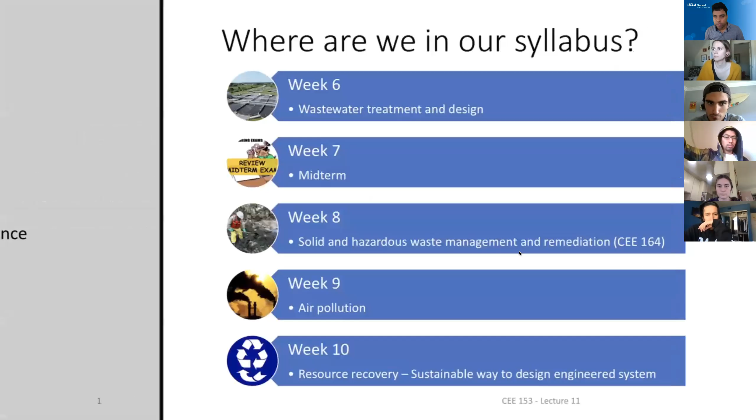Right, so this is lecture 11 on wastewater treatment plants and design. Again, just to confirm, this class will be part of the finals. So everything we cover from now on will not be part of the midterms, which is on week 7, as you see over here.

Hold on, let me see, the key's not working. Seems like the Bluetooth is not working, so I'm just going to turn it on. Pencil, see if it is connected. No. Okay. Right. So now this will work.

If there are new terms, I'm going to emphasize those so that you know the concept of those specific terms. So these are the different objectives. I strongly suggest there is a 10-minute video of how wastewater treatment plants work, and you should watch this one to get an idea of the concept. But I'm going to show another small 3-minute version that will give you a more specific example of how a wastewater treatment plant works.

Just to give an idea, here you are not looking at wastewater coming from industry. We are looking at domestic wastewater. Domestic means like people's sewer, that doesn't have lots of toxic chemicals. This is just organic from the kitchen sink, your restrooms, all that water goes to the wastewater treatment plant. So just to clearly emphasize there. So let's watch a 3-minute video so that you can see how it works before we go to individual concepts. So I'm going to see if that works.

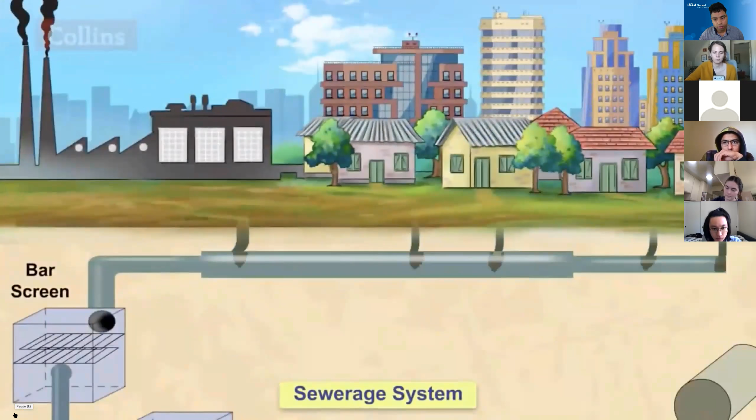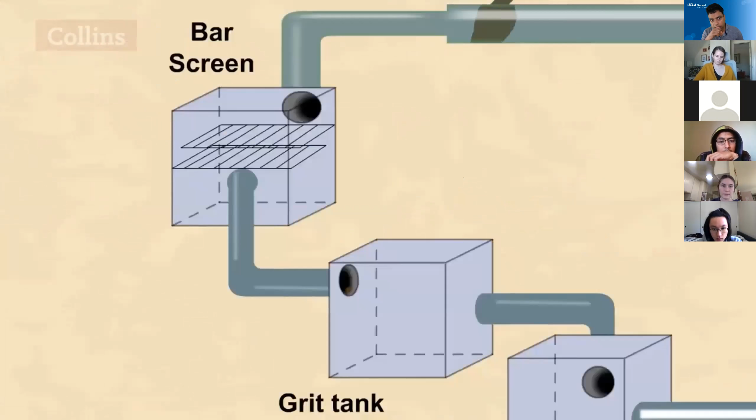Cities and towns have sewerage systems in place to carry the wastewater from our homes, hotels, factories, and other establishments to a sewerage treatment plant where the wastewater is treated. It is then deemed safe to release into other water sources. The treatment of wastewater goes through different stages. Wastewater is treated to remove the physical, chemical, and biological contaminants present in it through various processes. The pre-treatment process involves the sewage being sent through grids or vertical bars that can remove large solid substances like metal cans, paper, and plastic materials. In the primary treatment process, the sewage flows through the grit chamber very slowly, so that the sand, pebbles, and soil settle down at the bottom.

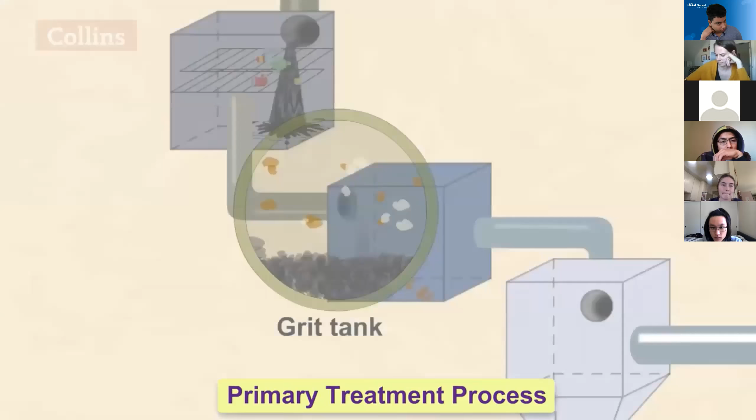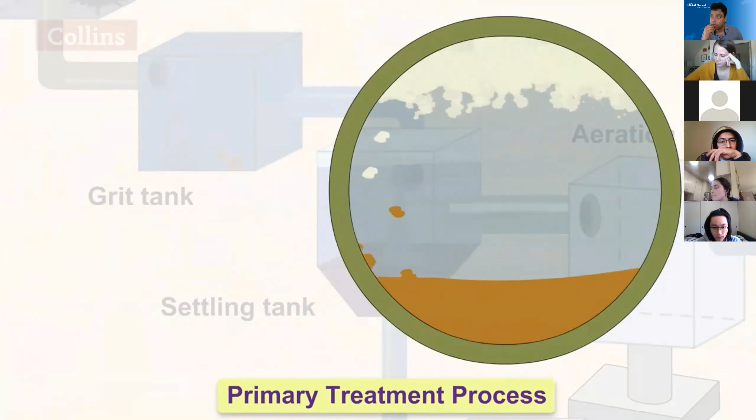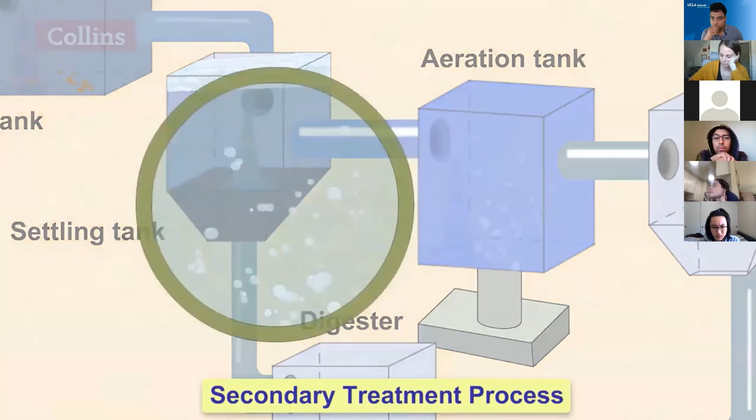The sewage flows into the settling tank or sedimentation tank, where the solid wastes like feces are allowed to settle down. Wastes such as soaps, oils, and grease rise to the top of the wastewater. The waste material that settles down at the bottom is called the sludge, and the floatable material is called the scum. Scum is then removed using a skimmer, and sludge is removed with a scraper every few days. The water that is left out is called the clarified water. In the secondary treatment process, biological or organic wastes are removed. It is a biological process. This is done by transferring the clarified water into an aeration tank, where air blowers bubble air, which helps the aerobic bacteria to grow and feed on the organic contaminants, such as food waste, feces, and other organisms.

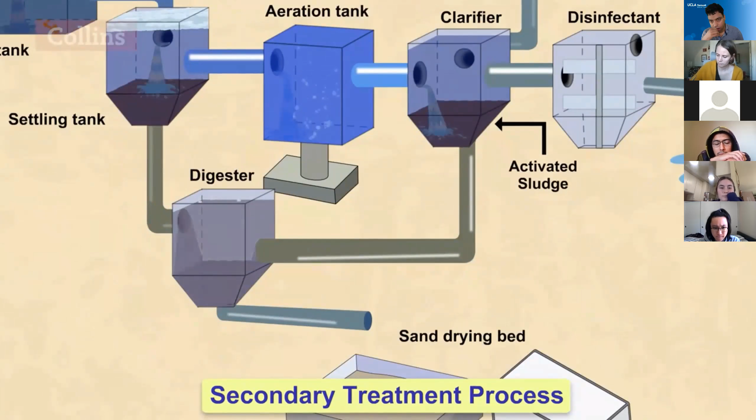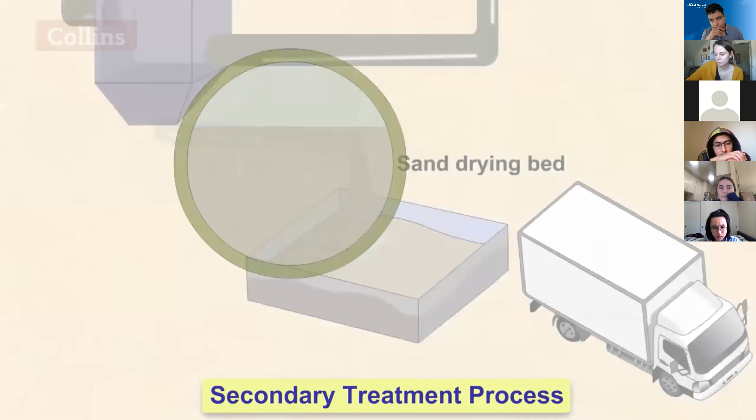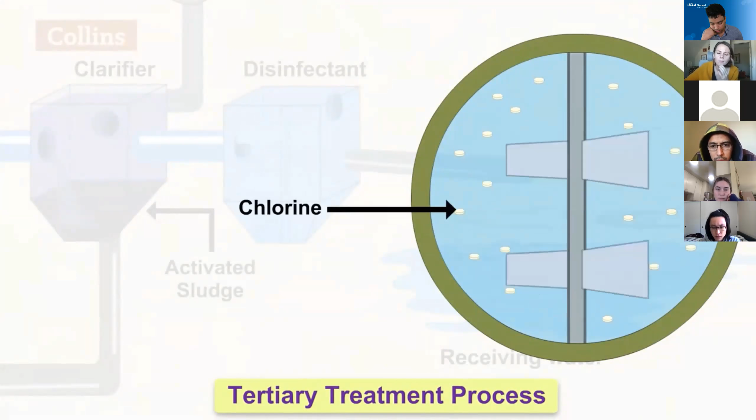The mixture then flows from the aeration tank into the clarifier, where activated sludge settles out by gravity. The activated sludge so produced, along with the sludge produced in the primary process, is transferred to the digester, where it is decomposed by anaerobic bacteria. Biogas is produced in this process, which can be used as fuel or can be used to produce electricity. The activated sludge is then left in the sand drying beds. Some quantity of water in the activated sludge evaporates, and the remaining quantity drains through the sand beds. This leaves behind the remaining dried sludge, which can be used for making fertilizers or compost. In the tertiary treatment process, the leftover wastewater is treated with chlorine to remove the phosphorus compounds, nitrogen compounds, and bacteria. It is a chemical process. Chlorine tablets are added to kill the germs. This process is called chlorination. Then this water is let off into the water bodies.

What you just heard was a basic overview of how wastewater treatment plants work, but the specific design or the very specific units are different for different wastewater treatment plants. For instance, it says it's a biological process, but many wastewater treatment plants are anaerobic, where you don't have these aerobic reactors. And the disinfection isn't just chlorine; it could involve a lot of other factors. Many wastewater treatment plants do not remove nitrates, nitrogen, or phosphorus compounds, so you need other filters or processes. Everything isn't described in that one video—it just gives you a basic overview of the most common units.

Think of wastewater as sourced from different kinds of locations: domestic, industrial, agricultural. What we're discussing today is mostly the domestic type. If it's agricultural, you have high nitrogen content—high N and P nutrient content—so you have to remove those more in a different design. But if it's industrial, it has a very specific type of pollutant, so it might need very specific types of units. That's why you have to be mindful about which wastewater you're treating, what it contains, and what your main design goal is.

Just to let you know, 99.9% of wastewater is water. So by far the majority, by weight if you calculate, 99.9% is water, and the rest, 0.1%, is all the stuff we're talking about. That's based on mass. So the majority of the resource you're looking at is water.

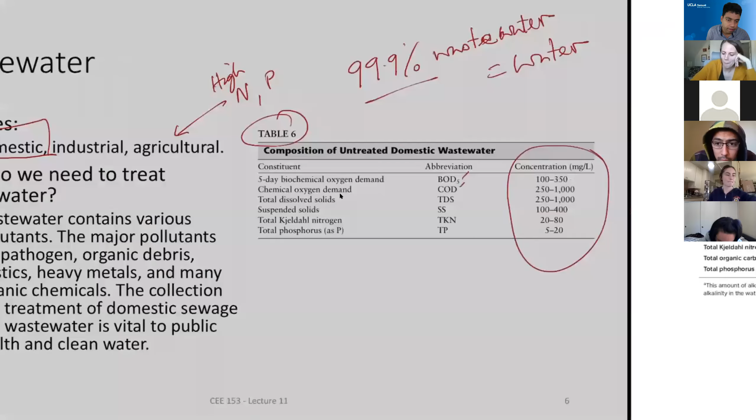But mostly what you're looking for is this type of pollutant, because the majority of these pollutants determine what kind of treatment units you should have. This is just to give you a range—last time I showed you the range here. This shows the medium concentration, strong, or other factors. As I said, there are lots of non-conventional pollutants we don't write there.

Many wastewater treatment plants actually monitor for pollutants, because if they're releasing into surface water, there's a TMDL, or total maximum daily load, associated with that. So they want to make sure they're not releasing a high amount of a specific pollutant, and they do monitor all these pollutants. But just to give an idea, wastewater treatment plants aren't designed to remove very specific pollutants. If you have a specific concern, they have to add a specific unit before they discharge it.

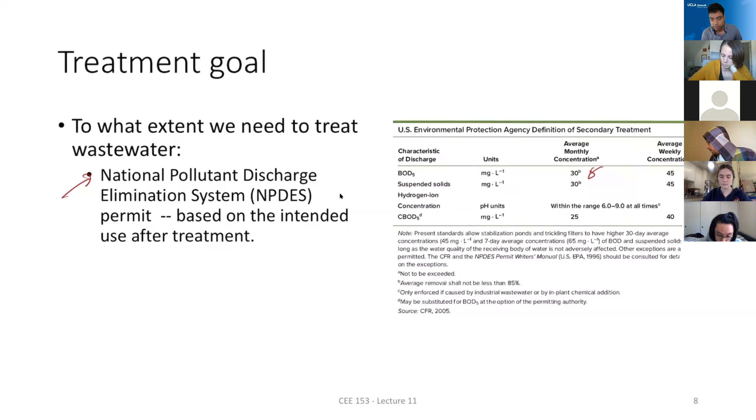That's why there is always a treatment goal based on a particular act—the National Pollutant Discharge Elimination System, or NPDES permit. Every wastewater treatment plant has that permit because they're discharging wastewater into a surface water source. For instance, in LA, we discharge most wastewater into the ocean. So there's a concentration limit—what pollutant concentration you need to have before you discharge. They monitor those, and these are the typical treatment goal concentrations. BOD5 should be less than 30 milligrams per liter, and so on for all the other parameters.

Then you have primary settling. Primary treatment is basically a sedimentation tank. The big circular tank you see in wastewater treatments is actually the primary treatment unit, where water moves slowly and then overflows, and that's how you settle all the particulates. Primary treatment can remove 35% of BOD. When we say BOD, it could be not just dissolved substances but also particulates, because there is organic debris. They can also remove some dissolved substance along with coagulation or settling.

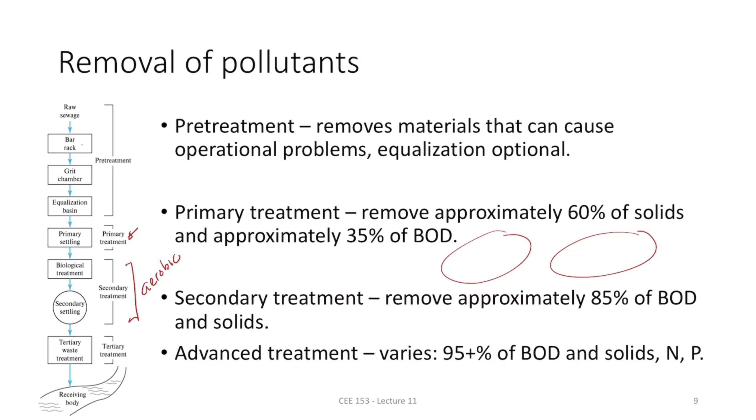That's why you might have heard about wastewater treatment plants where they actually take waste food from restaurants and dump it into the wastewater, because they want to increase the amount of organic matter for anaerobic treatment to be effective. We'll discuss that in the next few classes, but today we are going to discuss secondary treatments. The advanced or tertiary treatments are more about disinfection.

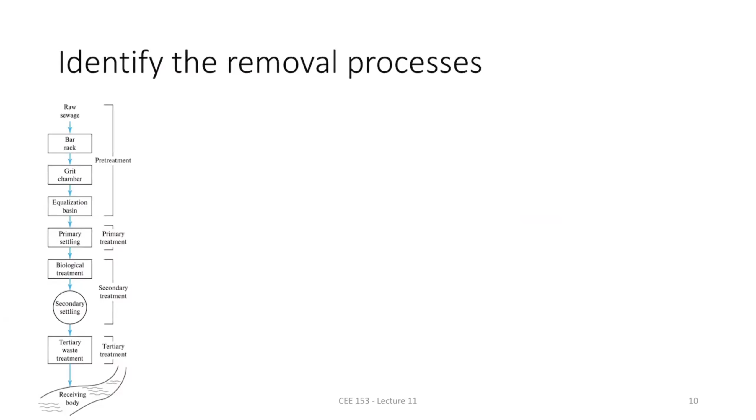So now that you've learned the process, let's identify the different removal processes. If I ask you what the removal processes are in pre-treatment, what would you write? Any volunteers? Think about what they remove in the bar rack. What kind of stuff would you remove there? Large trash, paper, cans, bottles - exactly. So what process would that be? It would be filtration, wouldn't it?

Exactly, it's filtration, because filtration is basically a size-dependent process. If you have a strainer, you remove all that. What about the grit chamber? What kind of process happens there? It'd be like sedimentation, a settling type thing. Exactly, so sedimentation.

The equalization basin doesn't really remove anything; it just makes things uniform. Primary settling is clear - you already mentioned sedimentation, that's it. To some extent, you might have coagulation, but they usually don't have coagulation or flocculation in wastewater because those are usually designed for drinking water. Sometimes you might see it, but it's not very common, so I'm not going to write that there.

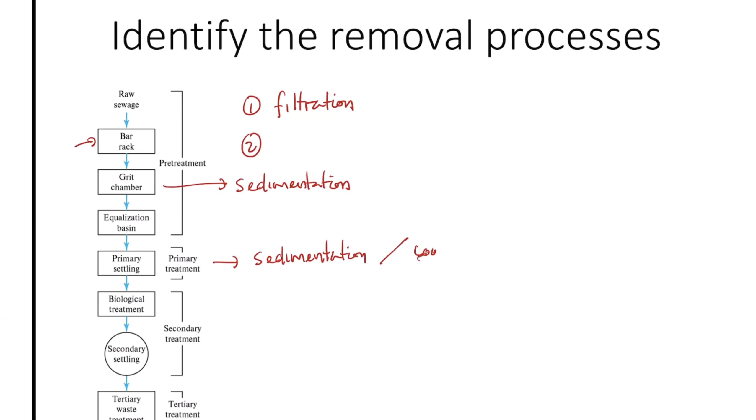Secondary treatment is already written there - it's a biological process. But I want to emphasize this: it's aerobic. That means you have carbon, which is the substrate, you add oxygen, and with microorganisms that becomes CO2, plus more microorganisms, plus energy. So this is BOD removal.

That's why you have to pump lots of oxygen, so this is the most energy-intensive unit. And there are advantages and disadvantages. For instance, if you want to make it anaerobic - some treatments, it's not written here, but if you make it anaerobic, what you do is produce methane.

So that's now energy. You can extract energy, meaning anaerobic process is an energy positive process where you do get energy, you don't spend energy. In fact, a lot of times plants have a combination of both, where some anaerobic units produce energy that will be fed to the aeration chambers.

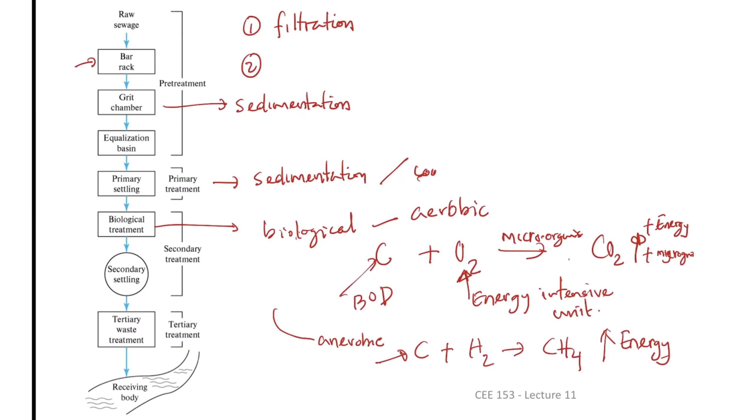All right, let's see a quiz, a multiple quiz question here. What you have to do is tell me, I gave you pollutants here, and you have to identify which location will remove each one. I'm going to label them 1, 2, 3, 4, 5, 6. So you have to tell me where those pollutants are removed. Number one, large debris and plastic. In this picture, which one will remove that?

There is a question in the chat - identify pollutants that are removed at different sections. So you have the pollutant, and you got to tell me where in these pictures those pollutants are removed. Large debris - can you identify the locations where they are removed?

Iman said the screen and grit chamber. Yes, so that will be here, where I'm going to write the 1. Let me zoom out. So where should suspended solids be removed? Probably primary sedimentation. Exactly, so that's going to be 2.

Then BOD. BOD is organic contaminants, right? So those are mostly dissolved. Bioreactor, exactly. So BOD is, as I said, C plus O2 becomes CO2. So that will be here.

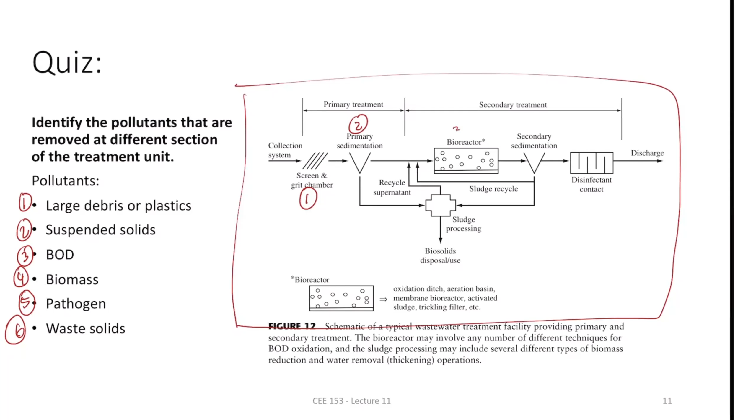Where the biomass is produced or removed. So the bioreactor is basically removing BOD by creating microorganisms, because some of the organic matter becomes carbon dioxide and energy, and the rest is assimilated into their body to become more biomass. So you have to remove those bacteria before you discharge it. That biomass will be removed here.

So the difference between 2 and 4 is that 2 removes most of the particulates in the wastewater, while the secondary sedimentation removes all the microorganisms created in 3. So you don't have lots of microorganisms left.

I have a question - the biomass, would that also be removed through the sludge processing? Yes, in fact that's why the sludge processing creates fertilizer, and those fertilizers are the bacteria. They are basically dead biomass, so they have lots of nutrients and all that.

We call that sometimes volatile suspended solid. I'm going to write here volatile suspended solid, and this one is suspended solid. There's a big difference. The difference is volatile - that means if you burn them at high temperature, 500 degrees Celsius maximum, you can remove those solids from the sludge.

Again, I showed you this particular video before, so this should all be what we are going to discuss, based on that video, or at least we already discussed that. So quickly, bar racks, how they look like.

Before that, there is a bar rack or filters. That's basically like a screen.

Grit chamber, as I said, there are different designs based on how you settle the sand or particulates. The way water moves will affect the settling in the tank. For instance, at the bottom, if you see how it goes, you have inlets here, and then water moves in a spiral motion. That spiral motion always helps remove the particulates.

There is a drive unit, and then you also have another system on top where it forces the water to move in a helical direction. Because of that speed, the particles are projected out of that circular path, so that way it is more efficient to remove those particulates.

So the difference between this and the settling tank is your fluid motion is not linear. It has to have some kind of spiral motion, which forces out the large particulates from the system.

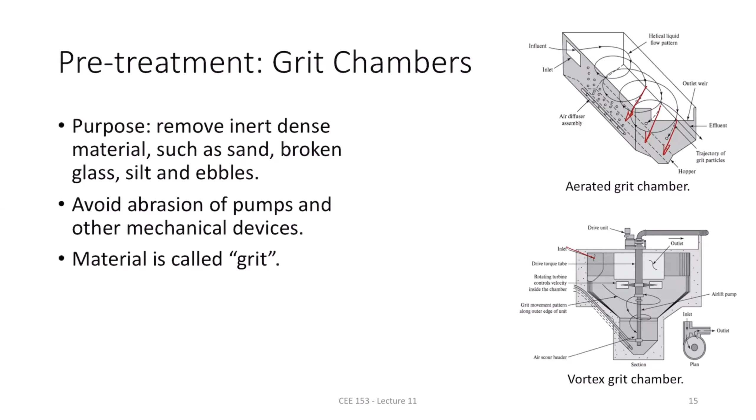Primary treatment systems, we already covered this extensively. They look like this: water slowly moves from one area, then overflows on top, and everything that's going to settle sinks to the bottom. We know the settling velocity equation.

Let me see if I remember. I know this is the difference between particle density, or solid density, minus the fluid, and then you have viscosity, and particle size squared, and there's a constant here, 18 somewhere, I have to check, so I'm just going to write it here. This equation also has a g term, acceleration due to gravity, and I think there's an 18 or something, I have to check.

But the point is that this primary settling tank depends on the difference in particle density as well as particle size. The bigger the particle size, the easier it is to settle. The heavier the particle, the more it settles. Viscosity doesn't change much, so you don't have to think about that effectively, but viscosity can change from winter to summer, which introduces some degree of inefficiency.

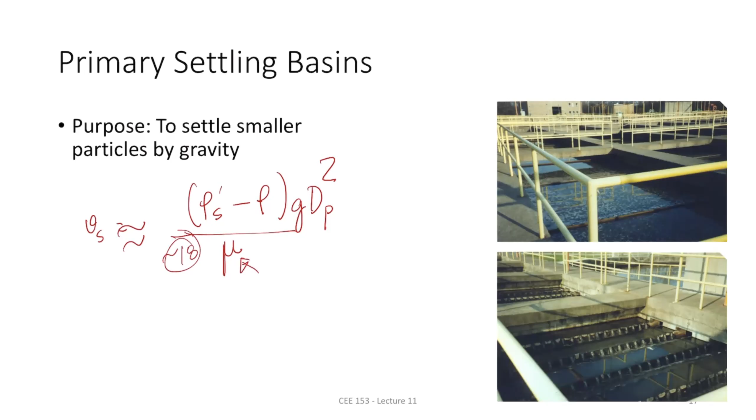We've learned that many times, so I'm just going to give examples. This is also part of your homework 5, as you see. I'm just going to give another example here to illustrate the concept.

Most of the questions in homework are related to design, where the sizes are given and you calculate the removal percentage. But in these examples, they do it the opposite way: they give you the removal and everything else, except the size, so you have to back-calculate the size. Let's see how to solve it.

A town of 30,000 people sends half a cubic meter of wastewater per person per day to the wastewater treatment plant, to a conventional circular primary clarifier. Since it's circular, that means you can determine the diameter.

The clarifier is designed to have an average retention time of 2 hours. Average retention time is the average amount of time water stays inside the system, which is basically the volume divided by the flow rate, how much flow rate you are adding. So this is the volume of the clarifier.

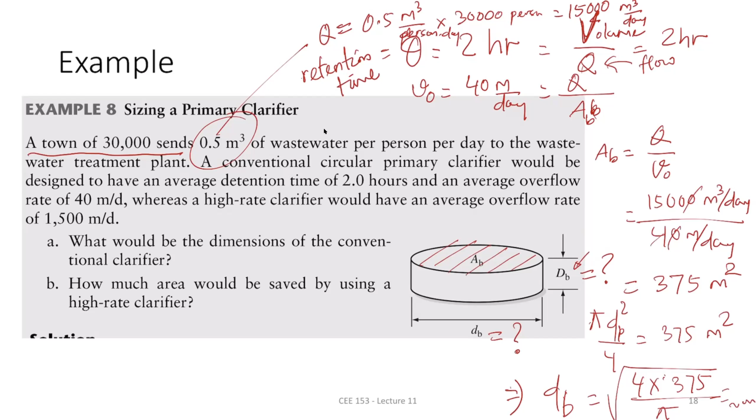Now, how do you determine the depth? You can determine it based on volume, and that equation is here. Theta, retention time, is volume divided by flow rate. Flow rate is Q, and total volume is pi d_b squared by 4 times the height. That's a cylinder, so the height is the depth. So the depth would be flow rate times theta divided by pi d_b squared by 4.

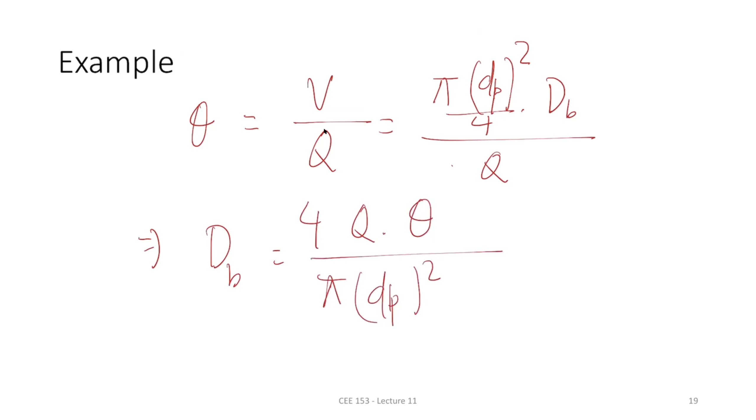And one thing you have to be mindful of, theta is in hours, so you have to convert units. This is meter cube per day, and this is hours. So one day would be how many hours? 24 hours. So that you have similar units. Everything else should be okay. This is meter squared, this is meter cube, so this answer should be in meters.

Okay, so a lot of times your questions in midterms will be indirect like this, because you are given everything, you just have to back calculate all of that. So I would always pay attention to the process in your homework questions, because midterm questions will be exactly similar, but the type of information given to you will maybe be opposite. So you have to back calculate a lot of these factors like that. Okay. Any questions?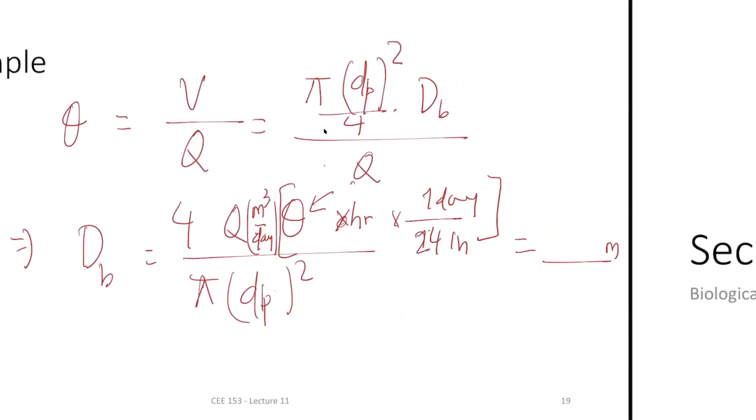Can you go to slide 18? Okay. Yeah, like you got right there, you got dB. Okay. And then on the next slide, did you integrate the equation? No, you don't have to integrate because it's already given. So dB is given. Oh, okay. So you just substitute that value directly, because you are just rearranging. I'm just trying to find what the capital dB is. This you already calculated on slide 18. Okay.

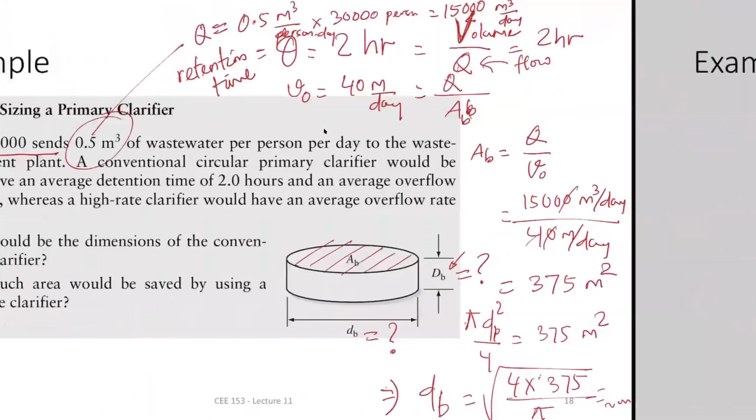And the second question is how much area would be saved by using a high rate clarifier. So this one is basically saying what that area would be if you use a high rate clarifier. So we always use 40, right? That's the one we calculated. So if you use a high rate average overflow rate of 1500 meter per day, that's the overflow rate. You know that overflow rate is Q over area. They're asking how much the area is going to be.

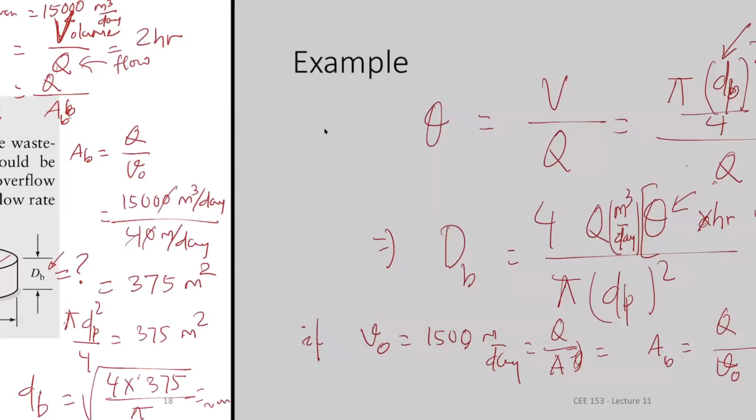So your new area would be Q over V. We know this one is 15,000 meter cube per day divided by 1500. So that means you are looking for 10 meter square. So that's the area. Then check what your initial area was. Your area was 375 meter square before. Now you reduce that to 10 meter square, so you do reduce significantly. That's the correct answer. That's how you should be able to calculate.

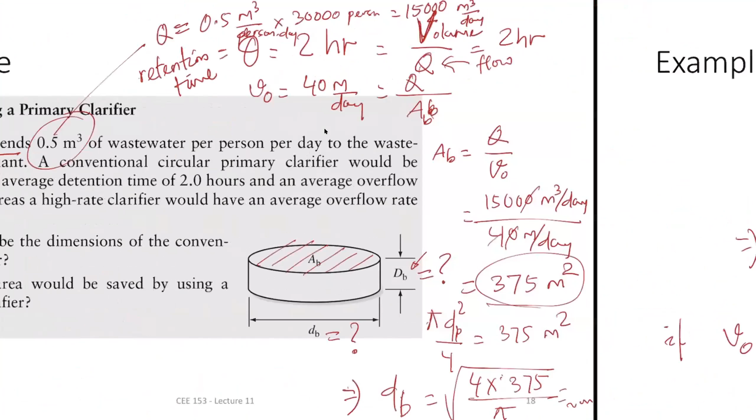Okay, so again, these are all things you already know. You learn a little bit more about the specific parts of the treatment design, but the most important part of wastewater treatment plants is BOD removal, which is secondary treatment. You know the concept of BOD, so we're just going to apply BOD and mass balance to solve the problem. We'll go through the background very quickly. The concept here is that you have microorganisms which take this carbon from BOD, so that's the source, and you supply O2.

Then the idea is they produce carbon dioxide, which will go to the atmosphere, because that's complete removal of carbon. And then what you get is basically lots of microorganisms, because they are growing inside. So I'm going to put that downward arrow just to show that they are creating lots of solids. So which wastewater treatment plants are more efficient? Any plant where microorganisms can produce carbon dioxide more efficiently is more likely to be efficient, because you don't want to create lots of microorganisms.

You want the microorganisms to eat the carbon and produce carbon dioxide and not grow that much, because if they grow so much, you have to deal with all this as bio waste. So you are removing one type of waste and creating another type of waste. So very efficient wastewater treatment plants are those that remove all the BOD, yet don't produce lots of sludge. That's what you have to think of.

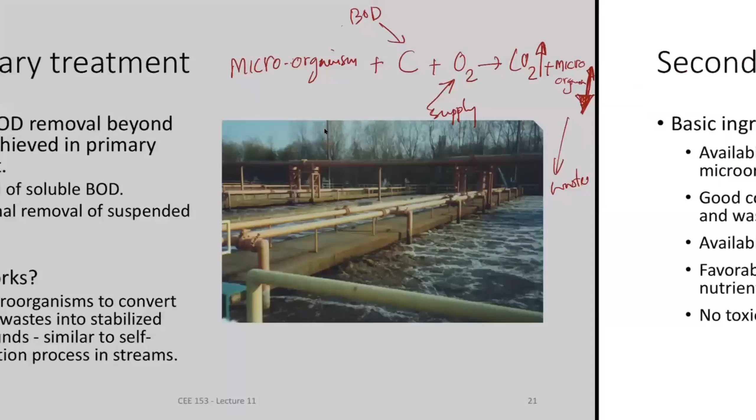So when you think of how to design those, the basic ingredients, as I said: you need microorganisms. That's number one, because these are biological reactors. You need a good contact time between organisms and wastewater. The longer they stay inside the system, the more likely the organisms are going to degrade it, because biological processes are very slow, so you need that contact time.

Then you have to have also lots of waste available, because if you don't have lots of food, they are not going to be efficient. That's why the wastewater quality is also important. If it's pretty clean, it's very hard to make the biological system very efficient. That's why sometimes you have to add some more waste. They add organic. If the quality becomes very good, they have to add some kind of organic. So they always save some of the very nasty waste around, just to add them, dump them back into

the system. Then the third one, which is more on climate or conditions, is temperature. That's why wastewater treatment plants are not very efficient in winter. So you have to think of how to heat up that wastewater. pH: microorganisms are more efficient at neutral pH. So if the pH is much higher or lower, then there will be a problem. So you have to adjust the pH if it is needed.

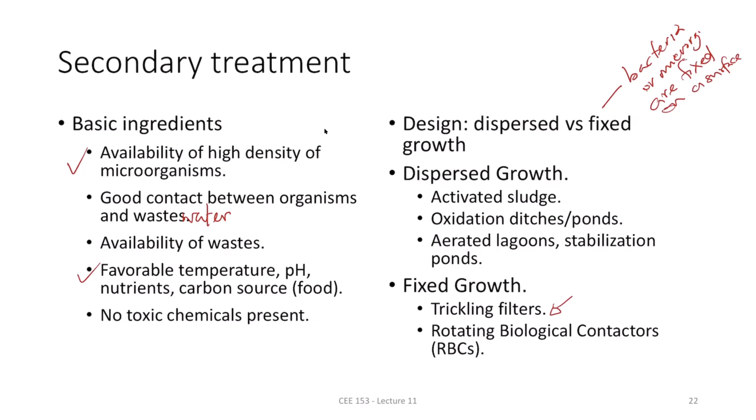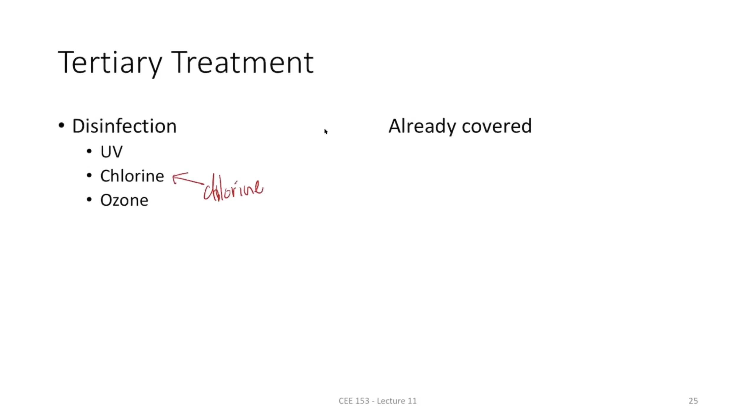And tertiary treatment, we're not going to go through it. You already know this means disinfection. You could do UV disinfection sometimes, but this is more common. Chlorine disinfection is much more common than any other type of disinfection. This is already covered. Again, this is disinfection rate. You know this

let's say dC/dt equals minus k times the concentration of microorganisms. Here this is microorganisms, so biomass, or particularly this is pathogens. We are looking for pathogens, not the other type. So we are not going to cover that. So mostly we are going to cover the design of activated sludge. Any questions?

Okay, so let me see the chat window just in case there are questions.

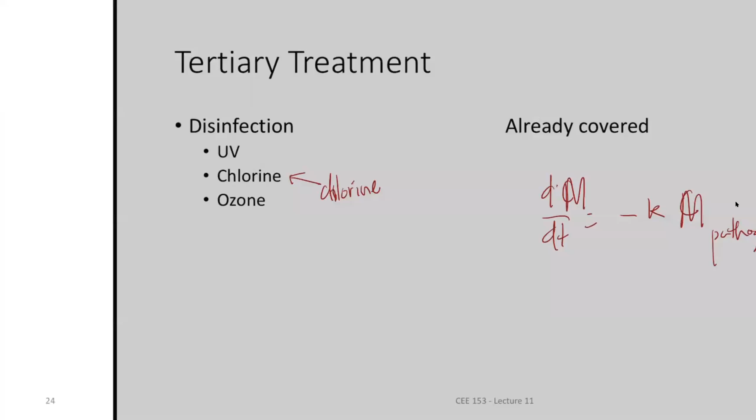All right, so now this is the main part of the wastewater treatment plant design. So let's understand the concept. There are many terms, there are many symbols that you see over here that can be very confusing. Let's just go through the notation, so you know what those mean. Every time you see Q, that is a flow rate. Okay. Then there are multiple things.

Now, first, there are the wastewater treatment plants. If you take wastewater, it has a lot of things. It has microorganisms. So we call that X. X means microorganism. A lot of times we call it volatile suspended solids. Again, the reason is you can burn them. The biomass is solid that you can remove, because that's the way they measure sand versus microorganism. That's why they call it volatile suspended solids.

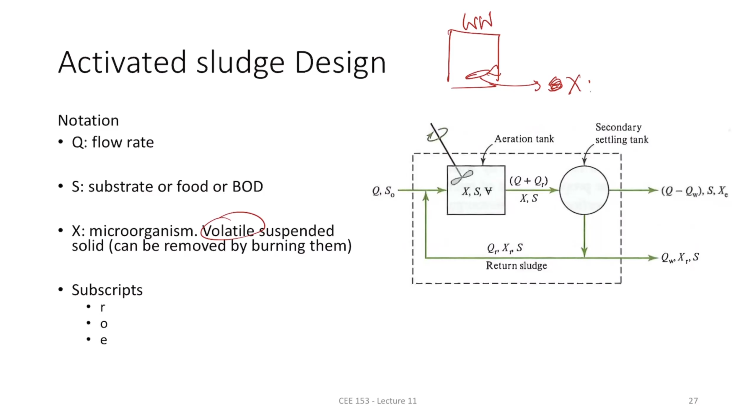Okay, and S is food or BOD. Anytime you write capital S, that's the substrate or food or BOD. So you have two different types of concentrations. One is the substrate, which you want to remove. Another is microorganism, which you need to remove the substrate S. And then you have lots of subscripts such as R, O, E.

When you see E, E means effluent. It means things have been treated. That's the effluent. O, the reason they write O, is basically influent. If you see the initial concentration, they always write 0. So that's why you see 0 over here. So this is coming from the primary treatment system. So after primary treatment, everything that goes here is the S0.

So this S0, just to give you an idea, is not the original wastewater. The reason is the primary treatment system is already removing some of the BOD. That means you have to account for those factors. So S0 is the remaining amount of BOD after the primary treatment.

And R is recycle. Every time you see recycle, that means R. So where does R come in here? Again, as I said, the typical wastewater treatment plant doesn't have lots of microorganisms, so you have to recycle some of those back here. That's why you see this return sludge, R is recycle or return. Some of those are coming here, so that's why you see this R.

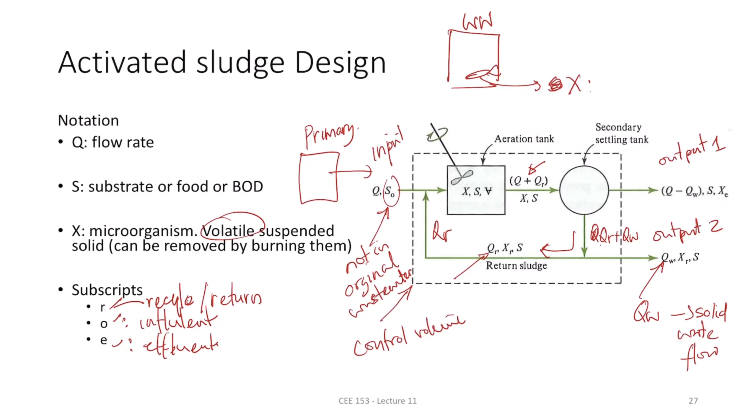So the question is, what does it mean after O and E? O means influent, E means effluent. R is return or recycle. Is V the volatile solid? Where is V? No, V is the volume. So this V over here is the volume of the reactor. Any other questions? Because you'll see this figure all the time when you solve the secondary treatment unit, so it's very important to know what these terms are.

And when you do the mass balance, this is how you do it. If you are doing the mass balance for S, I'm just giving an example here, everything that's coming in should be what is going out. So S0 times Q, that's coming in. What's leaving the system? Q minus QW times S, plus the second unit, QW times S. Okay, so that's the mass balance for the BOD.

If you do the mass balance for microorganisms, that will be Q times whatever microorganism comes here, which will be 0. There is no microorganism, or the concentration is so low that there is none. For the sake of simplicity, I'm going to write X0. So Q times X0 should be Q minus QW times XE plus QW times XR. Oh, sorry, that's not the.

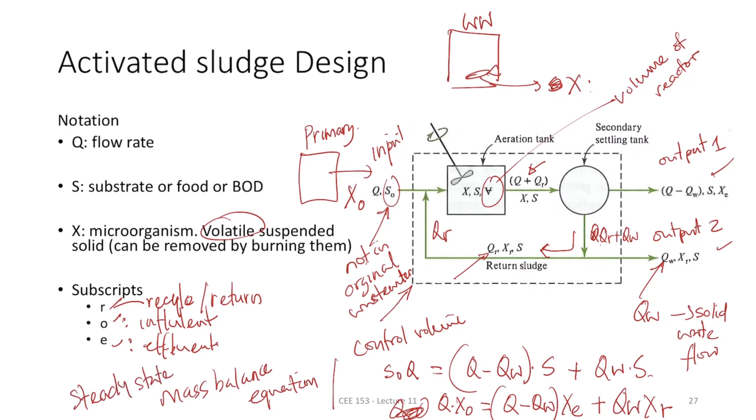All right, so again, if you do the mass balance for activated sludge design, I'm asking about this one particularly. What would be the mass balance for that one? If you think what's the flow coming in, the in would be Q plus QR. What is coming out? Q plus QR. Recycling is QR. So that's what's coming in there.

So now the question is, why is some of the flow from secondary treatment recycled? I wrote this question here to emphasize that wastewater doesn't have high X. Usually you don't have lots of microorganisms to initiate the treatment process, so you have to always add some more because you are losing all that, to make it more efficient.

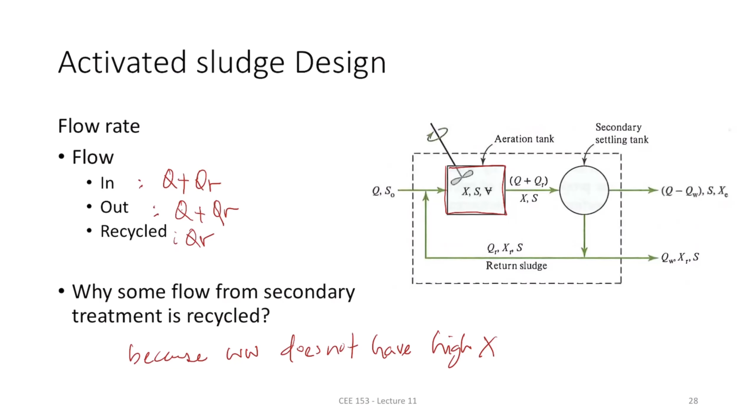And X is needed for efficiency. If you think of substrate, what does that substrate mean? No, this is not substrate, the way it's written here. Substrate is basically BOD.

There are two things written here. Let me see. So, we had a question: is there no reaction factor when you do the mass balance? There is a reaction, but that reaction is what makes the S become smaller. You're not writing it there because that reaction is inside the systems.

It's just a concentration mass balance, and every reaction is already accounted for as part of that S value. But you will see that when you write the final mass balance equation, there is a reaction term. For instance, for this S, when you write that one, there will be a reaction of this. So wait for the last mass balance equation, which we'll solve from that particular point.

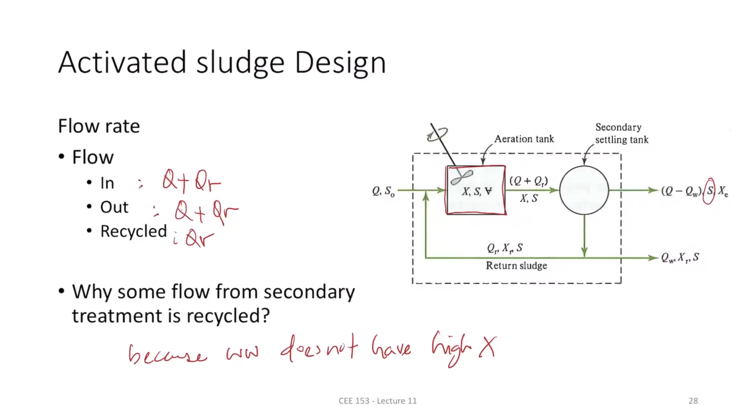All right, so there are a couple of things: substrate and volatile suspended solids. Volatile suspended solids are microorganisms. So this will be X, I'm asking for X.

X are microorganisms which are present naturally, but they grow inside those aeration tanks. So some of them you are going to put back, because they need to grow to increase biomass quantity. That's why, again, the definition is why it's called volatile.

Volatile means you can burn them between 105 to 500 degrees Celsius. You cannot burn the sand, you cannot burn the clay particles, and you cannot burn the rock-- so that's why they are not included. They are termed as volatile suspended solids.

So one key component here: when they defined this, they didn't think of plastics and all those factors.

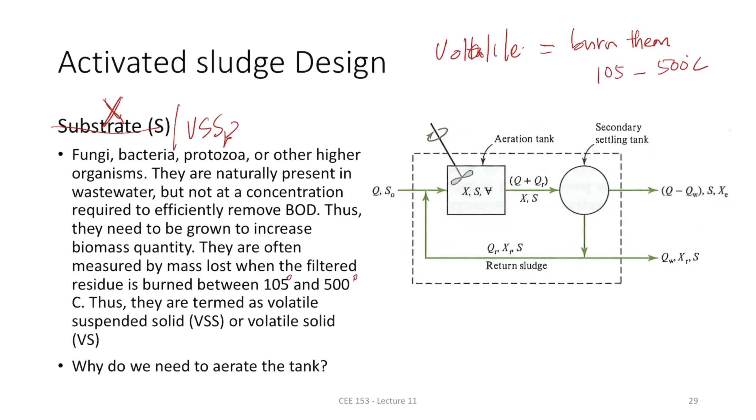All right, so what is activated sludge design? Let me go over why I put this. I already discussed this one. All it's saying is what the different processes are. So you have an aeration tank, your goal is to add oxygen here, then CO2 is released, and you produce carbon dioxide as well as microorganisms. In this process, you are settling.

This is the velocity of settling, and your goal in the settling tank is to remove all the microorganisms because you don't want them in the wastewater. So here your microorganisms grow, here your microorganisms are removed. That's the whole idea, because the aeration tank is where you are treating them.

There is no treatment of wastewater in the secondary unit -- you are not removing the concentration of S. That's why you see S0 is much higher than S. The reason is you remove most of the BOD in that aeration tank. Once it's removed, you don't remove any more S in these units, so this concentration doesn't change between here and here after going through this process. This S is always constant after it goes out of the aeration tank.

What we are going to discuss are the different terms that you already know, so I'm going to reintroduce the same terms again. As you know, this biological organism, one of the questions was what's the reaction term. That reaction term is inside here, so your X is changing and your S is decreasing, that's what happens.

Inside the aeration tank, or this is the aeration tank, X is changing at certain rate and S is changing also at certain rate. So how do you know that?

First, let's look at the microbial growth rate, how fast the microorganism is growing inside the aeration tank. So dx by dt is a constant, that's the growth mu, times the amount of microorganism present in the system. As you see, the growth is not necessarily a function of just the microorganism.

You also know that growth is a function of how much food they have. So if you measure the growth rate versus substrate concentration S, you'll get this kind of curve. That means if you have very small quantity of food available, initially microorganisms grow much faster because they are competing for the food and they are hungry, they are growing. But as you give more and more food, the growth rate will decrease.

The reason it decreases after a point is because of a couple of things. When there are so many microorganisms growing so much, they will also produce lots of toxic waste, which will slow down the growth rate. Also, the amount of food available per microorganism at that point will decrease, meaning they will not be growing sufficiently.

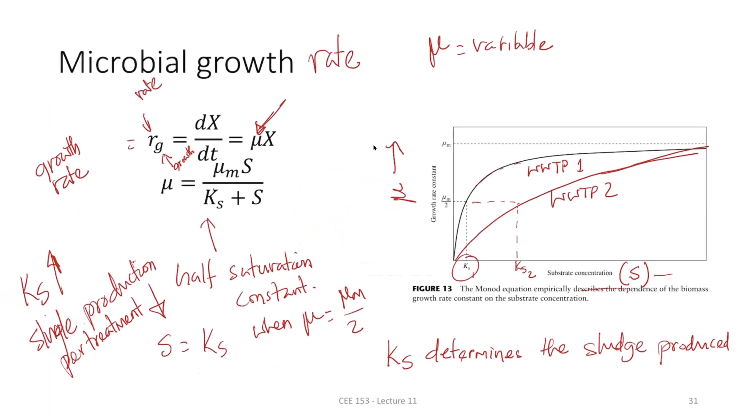As I said, this KS depends on how much substrate or BOD they consume before they grow. So that utilization rate is important to understand how much sludge is being produced. That's why RSU is the sludge utilization rate, or SU - substrate utilization rate - meaning how much substrate or BOD is being used. That's DS by DT.

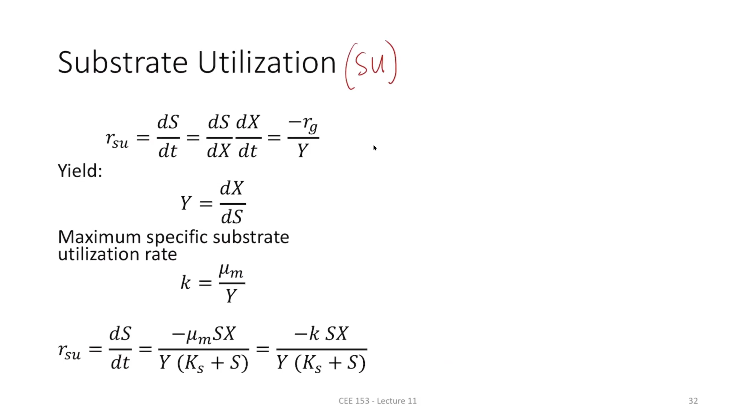So what you need is a low yield. You don't want the microorganisms to produce a lot - if they produce a very high amount, you have to deal with the solid waste. You also don't want Y to be very small, because that means your wastewater treatment plant will take a long time to restart, since it takes microorganisms time to reach a certain amount.

So your yield Y should not be too high, because it produces waste, and it should also not be too low, because that means it's less efficient - if there are not enough microorganisms, the entire wastewater treatment plant will not be efficient. So your Y value should be something in between.

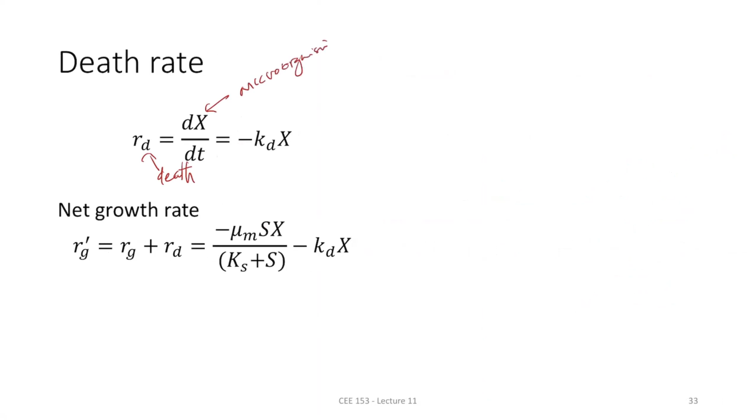dx over dt is minus kdx. Again, this negative sign is because it's decreasing. The other one is increasing, so there was a positive sign. There is a positive sign because growth means it's increasing, so there is no sign there, whereas this is a negative sign. So the net growth rate would be the amount grown minus the amount removed, because of the negative term here, so you directly write it there. So growth rate is this, and I already have growth rate somewhere written, this value.

There's no minus here, so that's right, minus kdx. So that's, if somebody asks you what is the net growth rate, if you have to calculate this value, you have the equations.

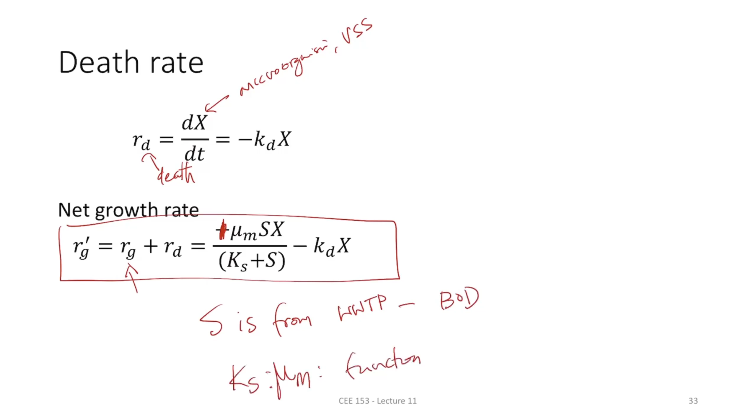S is from wastewater, this is BOD concentration. Ks, mu m, these are functions of microorganism, organism, or waste, and these are usually given. Kd is also given. X values are usually supplied. So in any wastewater treatment plant, these are usually given values. This is a constant, so these are all constant. As long as you know these constants, the only variables are these. You should be able to calculate the growth rate specific for a wastewater treatment plant.

So having said that, what I'm going to do is go over a couple of concepts before I explain how to solve these questions. These questions I'll solve in the next class because it's not really needed right now. We still have another class for wastewater.

So what I'm going to do is explain the concept of sludge retention time. Sludge retention time means how much time the sludge, or microorganisms, stay in the system. Why is it important? Because the longer time the microorganisms stay in the system, the more they are able to remove or treat contaminants.

So if you think of mass balance, sludge retention time is basically the total amount of sludge divided by the sludge removal rate. Think of retention time like how much water stays in your bathtub: it's basically how much water is in the bathtub divided by the rate at which you are removing it from the bathtub. It's exactly the same thing.

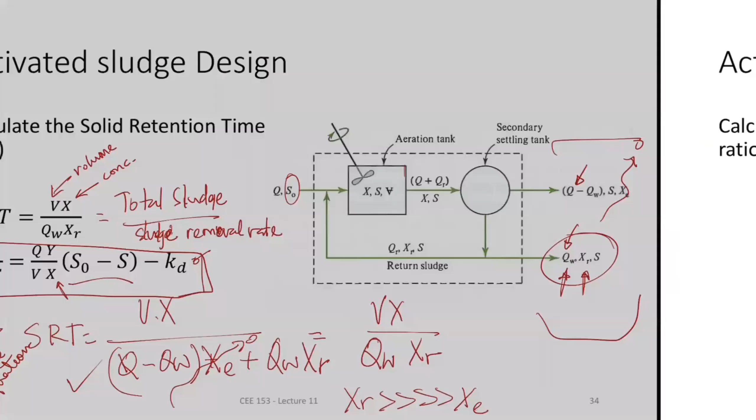Another last concept is to calculate the food to microorganism ratio. Food to microorganism ratio is basically how much food you have available for the microorganism divided by the total amount of microorganism. Food means the total amount of BOD. So how much BOD you are supplying, S0, and how much flow is coming in. So Q times S0 divided by total amount of microorganism, V times X. This is volume, this is the concentration of microorganism, this is BOD or food, this is the flow coming in.

Okay, so when you think of the units, Q over V will be 1 over time. You cannot cancel S0 and X since they represent different things. The unit will be milligram of BOD per liter divided by milligram of volatile suspended solids per liter. And then Q over V is per time. So this is the unit. So what you are saying is the amount of BOD available per day per unit mass of microorganism. So that's the F over M.

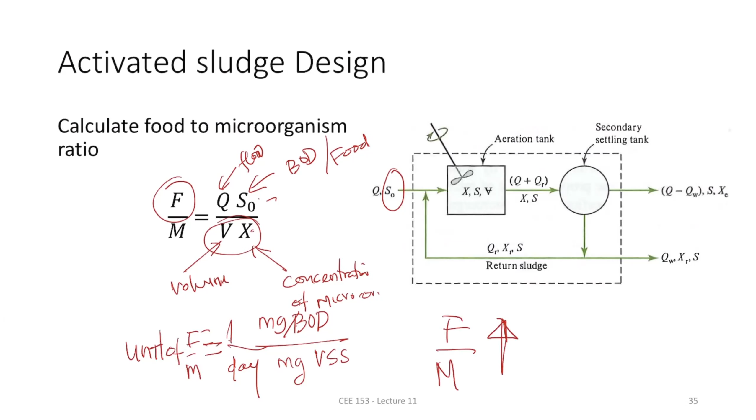So you want to maintain that by varying your recycle rate as well as the wastewater flow into the system, because you cannot change the S0 value. That's the amount of BOD there, the quality of wastewater. You can vary Q or QR. These are your variables, so you can change those to maintain the food to mass ratio at an optimum value. So that's all in terms of concept. Read the textbook so that you know what those concepts mean and why they are important. And these equations are given, so you just plug in values and get the answers.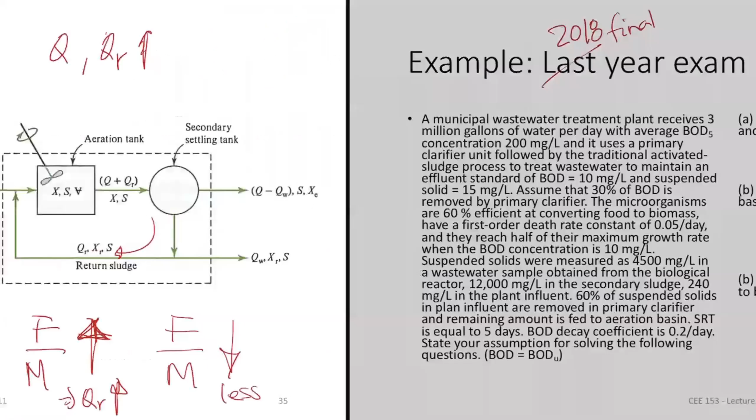Okay. A lot of times people have difficulty in these questions because they don't know what these different terms are. So 90% of the challenge is identifying those terms. Okay. So there is some question.

If food to mass ratio is high, it means efficient? If it is high, that means there could be two different things. It could be you have lots of contaminated wastewater. So your wastewater has a lot of pollution, a lot of pollutants, or a lot of BOD. And also this F/M ratio is applied here. Okay, so F by M ratio is applied to the aeration tank.

You want to have a specific ratio for them to be efficient. So when your F by M ratio is high, that means you have lots of food for microorganisms. That means you have to recycle more. So your recycle rate, you have to pump it up. All that means is that it's not about efficiency.

If your food to mass ratio is less, that means you have way too much microorganism. You don't need that much microorganism. So what you can do is you can slow down your recycle rate. So food to mass ratio, again, yes, you need a certain ratio to be more efficient. It doesn't mean that you have to.

Let me, in a second, let me make sure my sound doesn't shout. Pause.

Okay, so let's read the question. I'm not going to solve it completely, but your challenge is to find what the different terms are. So a municipal wastewater treatment plant receives 3 million gallons of water per day. It says the amount of water received per day. That means you already know Q is given. So I'm going to start writing those, okay? Q equal to 3 MGD. So this Q is given.

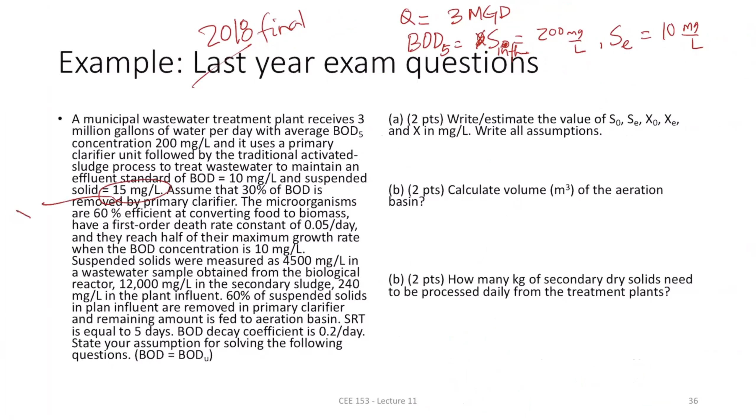So that means XE. I'm just going to start writing here, okay? So this is XE, this is SE, this is Q, this is, again it's BOD, so that means substrate. This is influent. I'm just writing influent. The reason is this is not after the primary treatment, so you have to assume how much primary treatment removes.

Then it says assume that 30% of the BOD is removed by the primary clarifier. This is what I was talking about. So that means you have 200 milligram per liter BOD coming in the wastewater. 30% are removed. So that means S0 is 70% of what is coming in, milligram per liter. So that will be 140 milligram per liter. I'm sorry, the noise is too much in the background.

Then everything is given. So X0 is, does it say where the X0 is? All right, let's read and then we'll find out. The microorganisms are 60% efficient at converting food to biomass. So what it's saying is the amount of biomass they produce, they are 60% efficient at converting food to biomass. So that's saying how much biomass they produce per unit consumption of food. So if you think of the units of everything, that's where the units come from. So amount of biomass they produce per unit consumption of food. Okay, so they are 60% efficient.

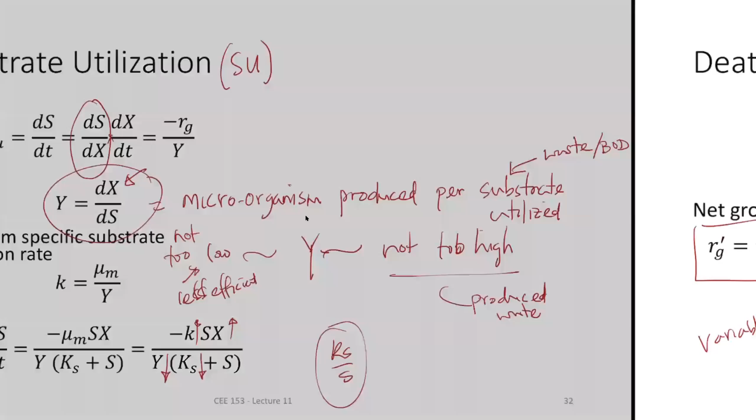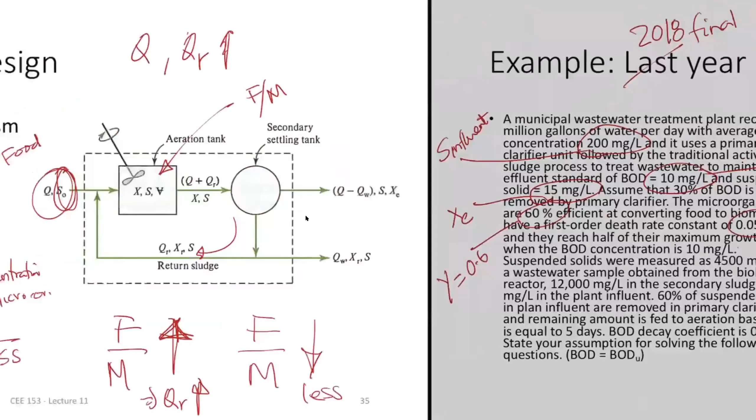So yield is 0.6. Okay, so this is yield equal to 0.6. The microorganisms have a first order death rate. So the death rate is given. So the kd is given. And there is half of the maximum growth rate when the BOD concentration is 10. So again, what they're saying is there is half of their growth rate when the BOD concentration is 10. That means Ks, the saturation constant. So this is Ks. Okay.

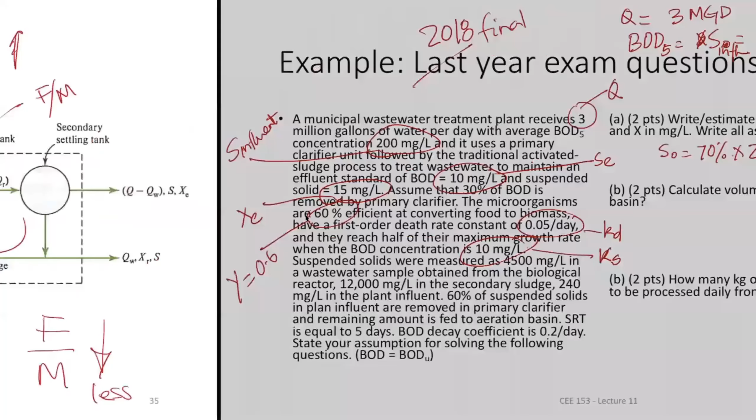Suspended solids were measured at 4,500 milligram per liter in wastewater samples obtained from the biological reactor. So that means if you measure the suspended solids, that's X here. So this is X.

Biology reactors and 12,000 milligram per liter in secondary sludge and 240 milligram per liter in the plant influent. So here you are talking about X everything. Okay, so this is in from biological reactor. This is in secondary sludge, so that means X waste or XR, and then 240 milligram per liter in the plant influent. So this is XE. Okay, so you can write XR equal to XW. Okay, so they are all very similar concentrations.

60% of the suspended solids in plant influent are removed in primary clarifier. So it's saying that 60% of the suspended solids are removed in the primary clarifier. So let's see what does this mean. And remaining amount is fed to aeration basins. Then second thing is the sludge retention time is 5 days. So this is SRT.

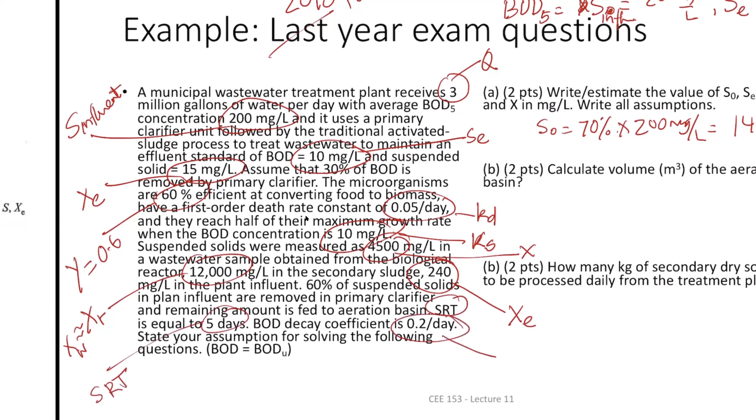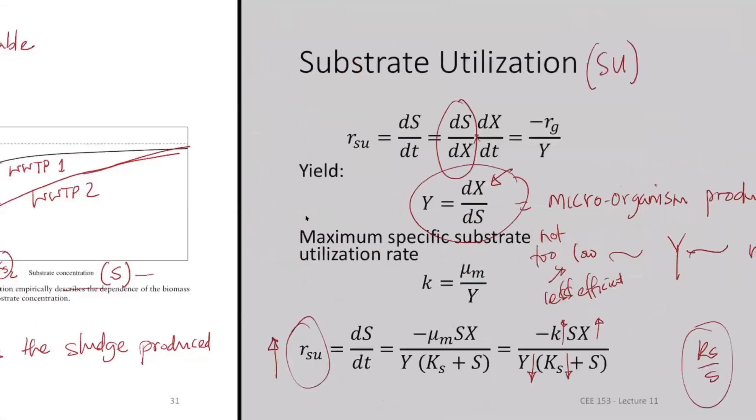BOD decay coefficient is 0.2. So that's basically how quickly the BOD is being degraded. So that value is here, K. So that K is not here in the equations, but that degradation rate is basically BOD degradation. It's not here. Okay, so that's BOD degradation rate.

So that means basically, if you remember, when we write the BOD concentration, BOD equal to BOD initial or ultimate BOD times e to the minus KT. Okay, so this K is here. All right, so there are so many things given here. So it says calculate the volume of aeration basins. Everything else I already wrote here.

Volume of aeration basins. So volume, if you see, is here. There are two volume terms. So now you can solve for volume based on any of them, as long as everything is given. X is given. The only thing that's not given in that equation is QW. Anywhere, if you see, there is no QW. There is no amount of sludge produced per unit day. That's not given. So that means you cannot use these equations to calculate V.

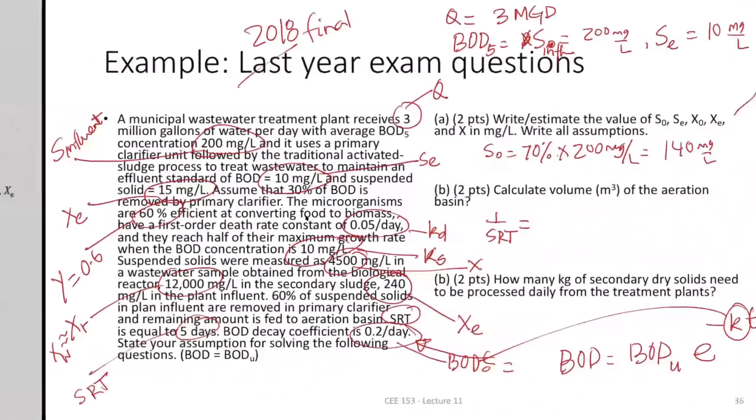So that means if you use other equations, 1 over SRT equal to, I'm just going to write it there, QY by VX, S0 minus S, minus death rate, okay, that's all. All right, so think of it this way. So that means you can solve for V. Everything else is given. SRT is given, flow rate is given, yield is given because 0.6, X is given, S0 is given, S is given, KD is given. So you just have to solve for V.

How many kilograms of secondary dry solids need to be processed daily for the treatment plants? He's saying how much amount of solid you are going to produce. So if you think of the equations that have amount of solid, it's basically here. So this is amount of solid produced, because that's the waste. So if you see SRT equal to VX over QW XR. So asking how much solid needs to be processed daily is the same as asking QW times XR, because this is the total mass, concentration times flow rate. So I'm asking basically what that value is.

All right, so as you see, I tried to solve it a little bit. Questions on wastewater treatment plants are always messy in the sense that you have so many different terms, you have to identify them. Once you identify them, you just plug the values into one of the equations and get the answers. It's not difficult in the sense that as long as you know what you are looking for, what these terms are, you can solve this question very effectively. All right, so that's all.

I don't know whether this is the same question or different questions. It's the same question, it's just repeated. So that's all in terms of the wastewater. Again, this is not part of the midterms. I would suggest that you read those 5 pages in the book. You should be able to understand everything we covered today.

Next class, we are going to learn about different types of wastewater plant design, because I talked about just anaerobic here, aerobic here. I'm going to solve more questions on wastewater next class, as well as talk about how to process the sludge, how to design wastewater plants in different types of design.